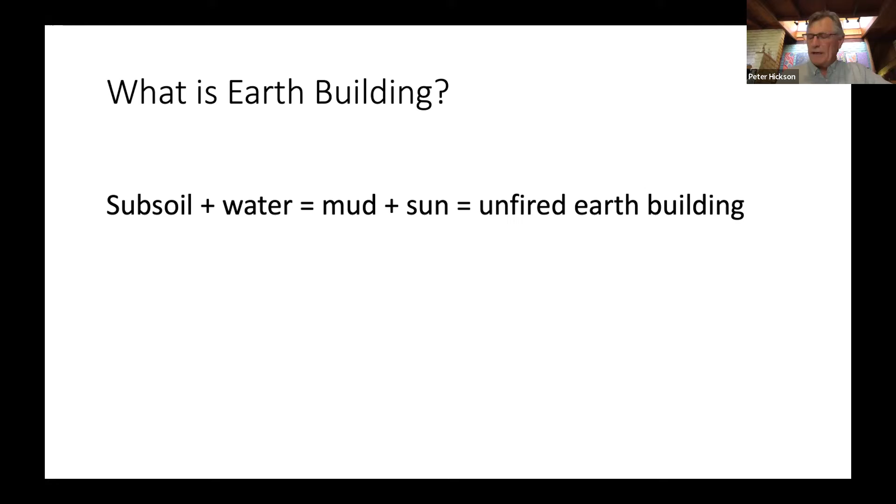It's found on every continent except Antarctica, to my knowledge. Archaeologists dated it back to Jericho some 11,000 years ago, though I think it's much older than that. I think the first Australians definitely used it, but how long ago, I don't know.

In Australia, there was wattle and daub, which is mainly what the first Australians did. Within weeks or months of the colonists arriving, they started to build wattle and daub and cob buildings, the sort of things they were used to in England and Ireland where they came from, as they had very little resources.

Mud brick was used in the colonies of Victoria, South Australia, and West Australia. Pisé came in the 1800s, and again was used post-war. Then stabilised rammed earth started in the 70s through to now. Poured earth is fairly recent, formed cob is very recent. The light earth method came in recently from Germany, to do with meeting energy requirements in colder climates. Earth renders came about for use on straw bale and on the light earth method. And then Ray's having a go at traditional, unstabilised rammed earth.

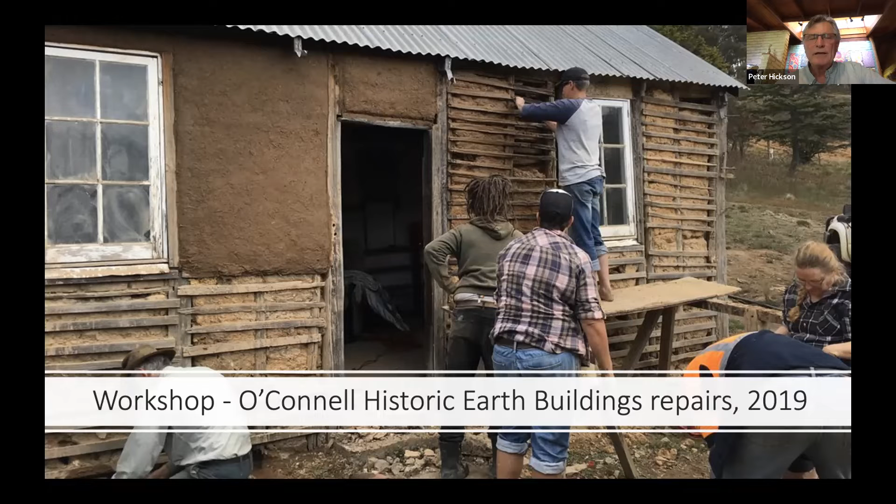This is an old building dating back to the 1800s that I had the privilege of working on a couple of years ago. It's wattle and daub, probably as basic as a building can get. We were doing some work on it - it hadn't been lived in for probably 20 years or so. There were uni students in it for a while back then, and while it's not listed as historic, it's definitely a worthwhile building to save.

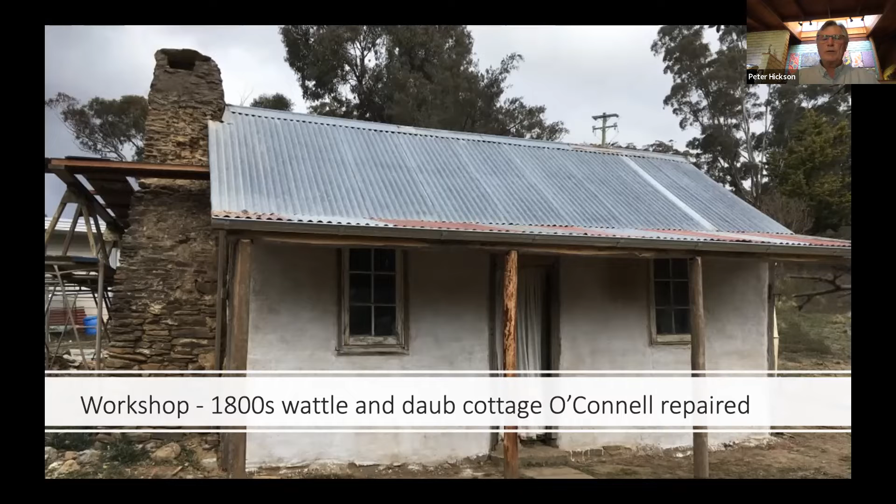So that's what it looked like after we did a little bit of work on it. We put a little veranda on it, capped off the chimney, and whitewashed it - earth render over the wattle and daub that was exposed before. And this is a cob building in O'Connell, New South Wales.

Some of my innovations and work have been involved with modern acceptance and practical considerations of using earth building today: local mud brick production, moving to load-bearing construction rather than post and beam, earthquake and hazard-safe buildings for low-cost solutions in Asia, pushing sustainability and the lowest possible earth embodied energy, incorporating renewables for zero-carbon full life cycle performance, optimizing earth thermal characteristics, lobbying for an assessment pathway for low energy passive buildings, climate resilience modelling, and then monitoring, assessing and auditing earth buildings to see how they go.

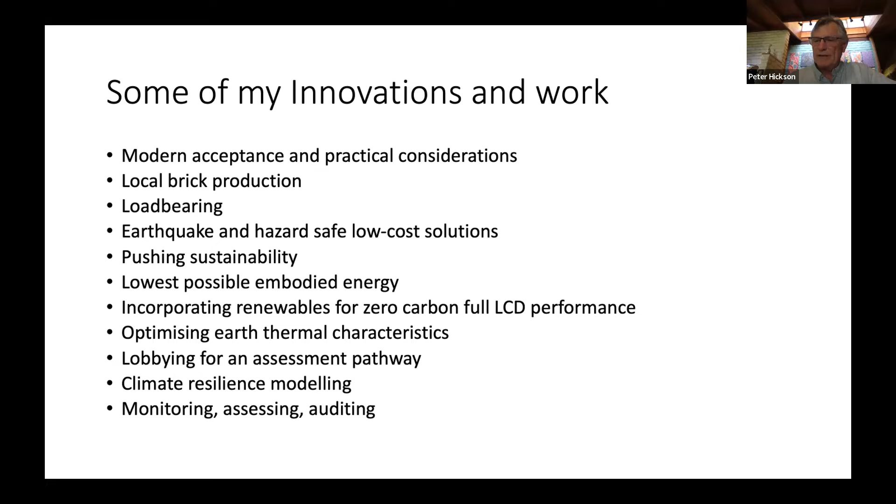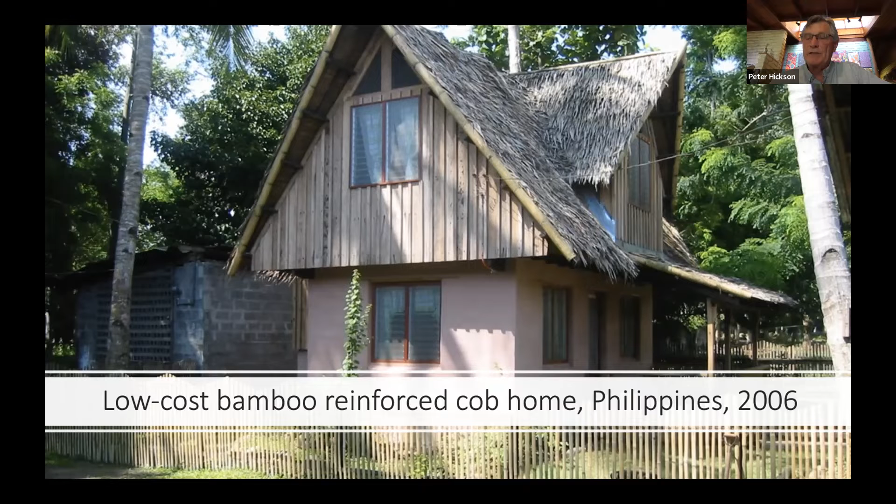Now, this is a low-cost building - a bamboo-reinforced cob building that I built in the Philippines for low-cost housing. It was tested at UTS University and achieved multiple shakes at 8.5 Richter and wasn't destroyed. So the innovation there is the fact that it's not really the material earth that's a problem, it's more how you use the material.

This is a carport and mud brick workshop that was lost in the Black Summer bushfires. You can see that the carport, all the iron and timber, which was open, took out the building and destroyed everything except for the mud brick wall, which was still standing.

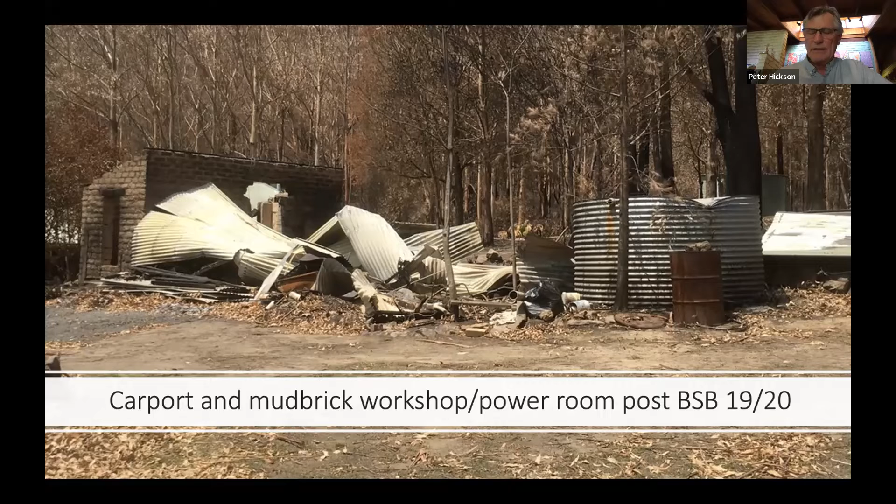You can see in the middle of the photo that the lintel and the doorway were burnt out. So some of that had to be deconstructed and reconstructed, but the mud brick was able to be saved and went back into a building built to be bushfire resilient, locking out embers, turned into a garage rather than a carport. There's a lot of detailing in terms of ember exclusion, so that should survive.

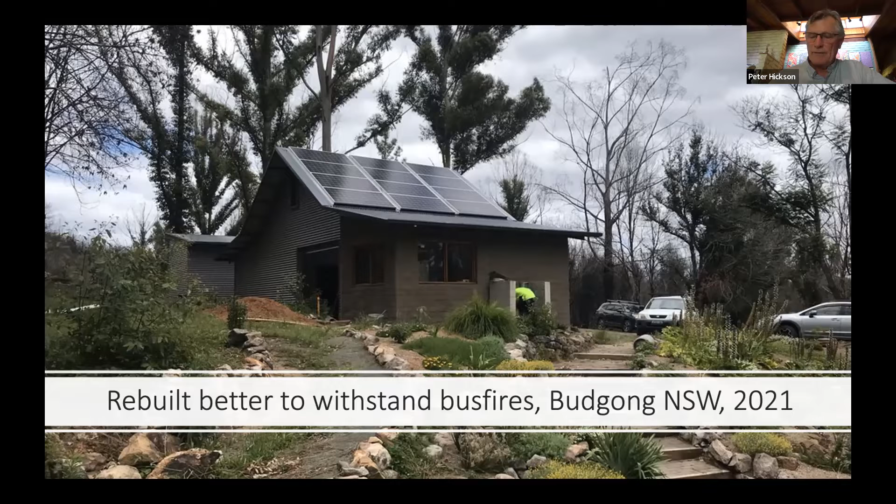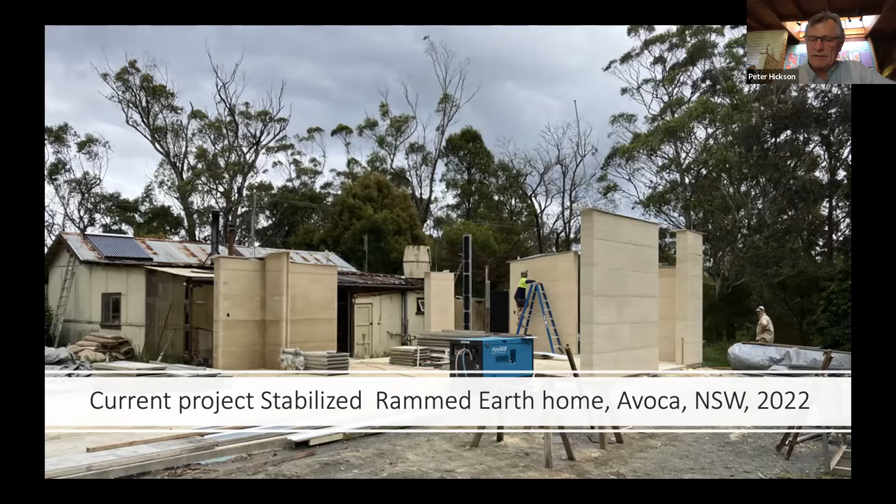This is the current project at the moment in Avoca in the Highlands, the other side of Kangaroo Valley from me. The old house in the background, part of it will be demolished back to the sound core, and that'll be linked into this new part of the building. I tried some perlite under the slab there, rather than doing a waffle pod. I don't like the sustainability of polystyrene insulation, and it sort of has to go to the tip to get rid of it at the end of the building's life. Unfortunately, you can't separate it from the concrete to recycle the concrete even.

There are a lot of innovations going on around the world. Over 11,000 years, people were self-building with different climatic and resource shortages, using what was available locally. Some people had no timber, some people had timber, freezing cold climates, very hot climates, all sorts of climates and conditions around the world, and the resources available to people, including their own time, has come up with a huge variety of beautiful vernacular design developed across the world. I'll just go through that. All these buildings are built by hand for people, so they're quite beautiful buildings.

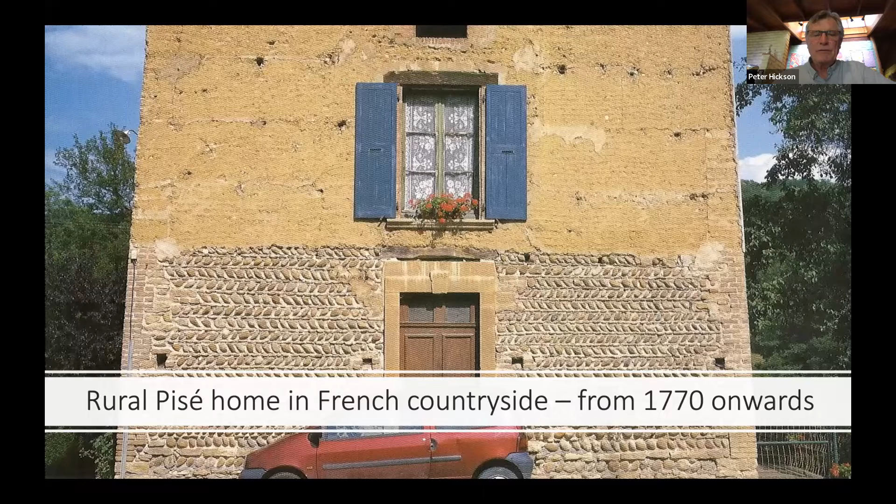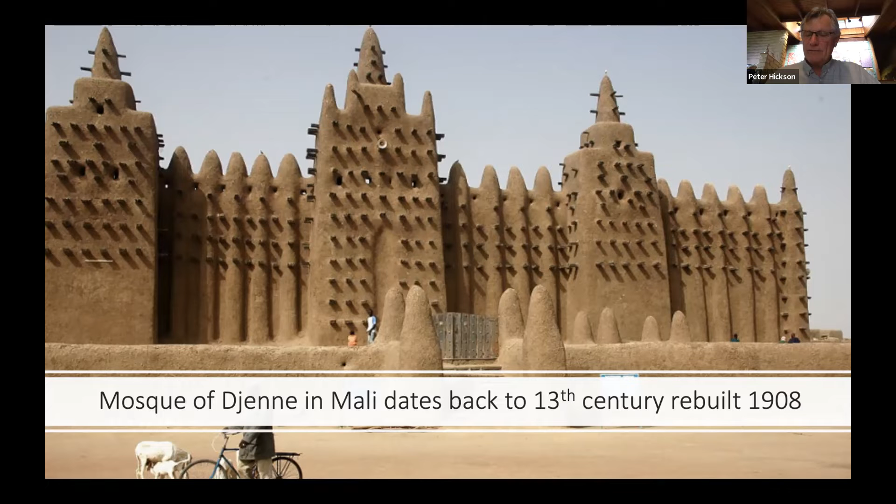Yep. So this is an ice house. They started doing these 700 years ago. They produced the ice outside in shallow pools and then they store it in a pit below. There's a pit, exploring that, and there's the roof of the ice house above. This is a mosque in Mali. They built the scaffolding into the walls, so they can do annual re-rendering by the community.

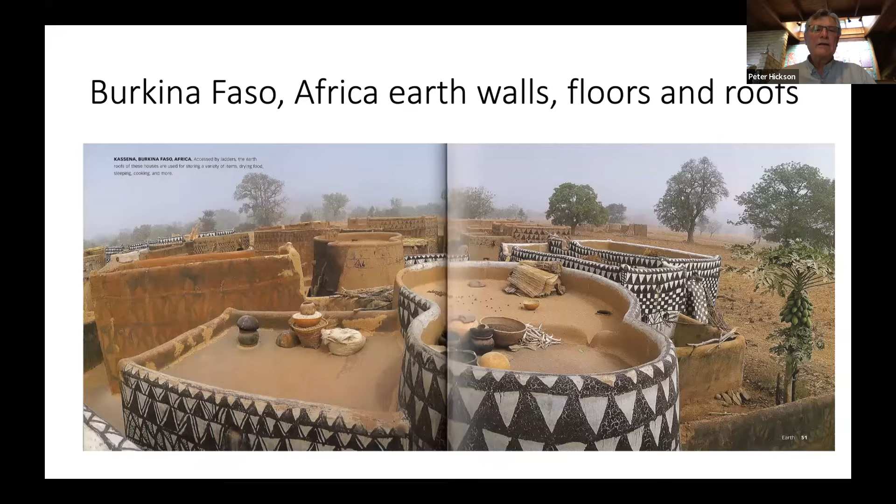In New Mexico, they used things like cactus juice to protect the walls from erosion. Beautiful buildings in Africa, where they used earth in the floors, walls, roofs. Here's an apartment block in France. In Lyon, there's a whole area where there's a rammed earth revival, started with Francois Cointeraux in the mid 1700s, and there's an extraordinary amount of buildings there. I'll get going through this.

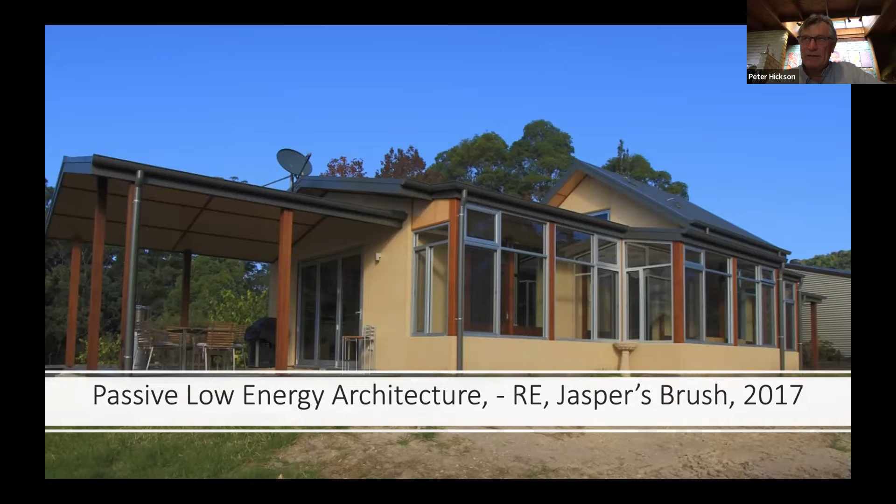There's a little building I did with earth floor and walls. I've tried to make it as sustainable as possible. All the earth walls came straight out of the ground there, out of the footings. It's got rubble footings, recycled windows, earth floor, and I tried to make it as low embodied energy as possible. It was built for a client who wanted to use their holiday house any time of the year and be comfortable. So it was designed to trap the sun in the winter and keep the house warm, and the veranda ventilated in the summer to keep it cool, fully ventilated with louvers.

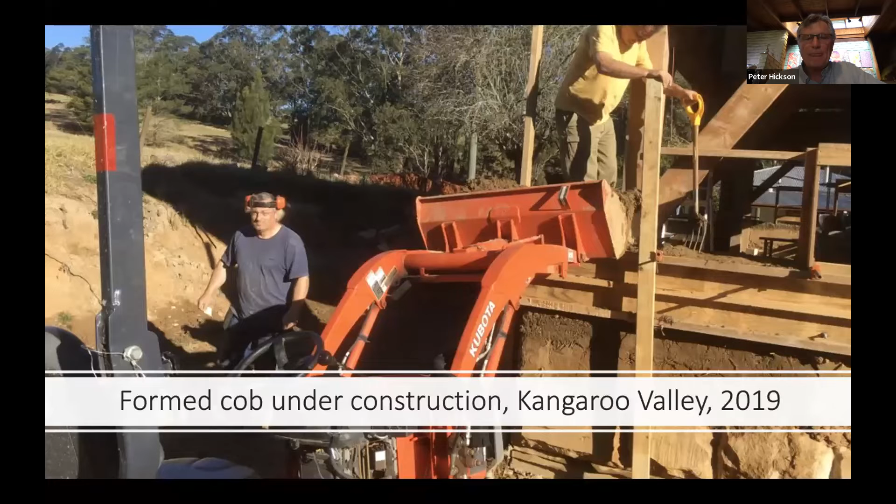It's inside. This is formed cob, which is something I'd like to work with. This is an experiment in Kangaroo Valley. That's the finished product there. That's all the local material straight out of the footings, rubble footings in that as well. Free draining footings.

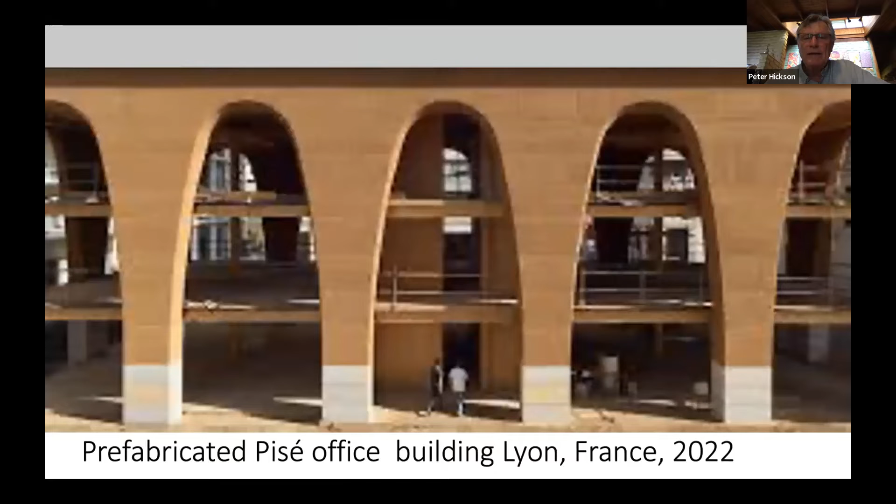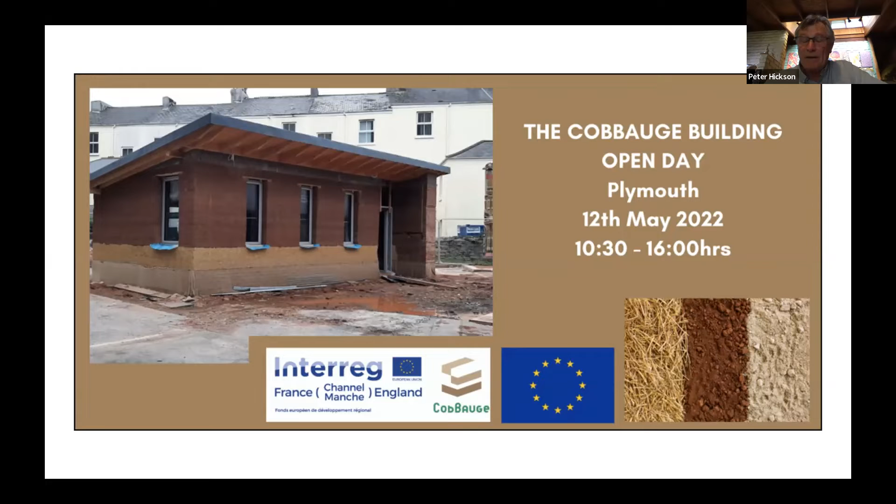So this is a co-housing project in Lyon, France, a recent one in the last 20, 30 years. Prefabricated rammed earth building in Lyon, brand new. All those columns were made in lumps and then lifted into place. This is a cob project at Plymouth University, where they're experimenting with getting cob up to code. In France and England, there's a joint research project there.

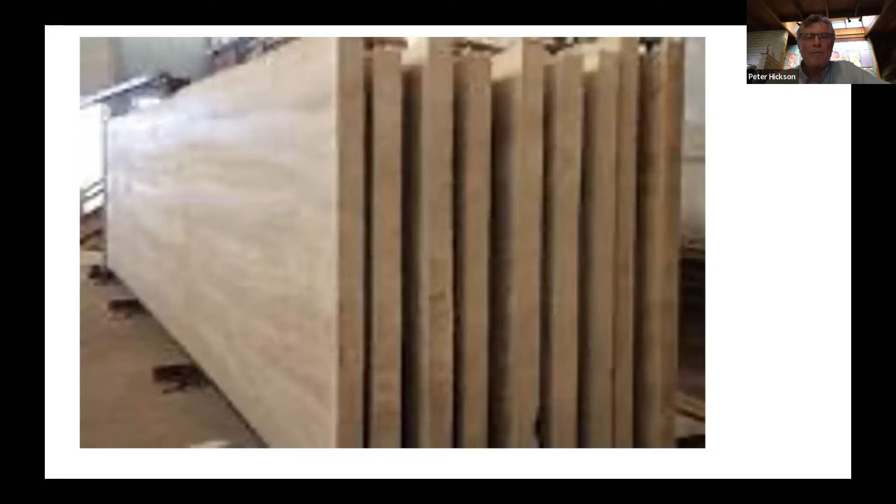Prefabricated rammed earth panels are becoming big time in Europe. That's a big factory, Martin Rauch's factory, where he does huge walls and then cuts them up, stores them during the colder months, and comes out and puts them together when the spring comes.

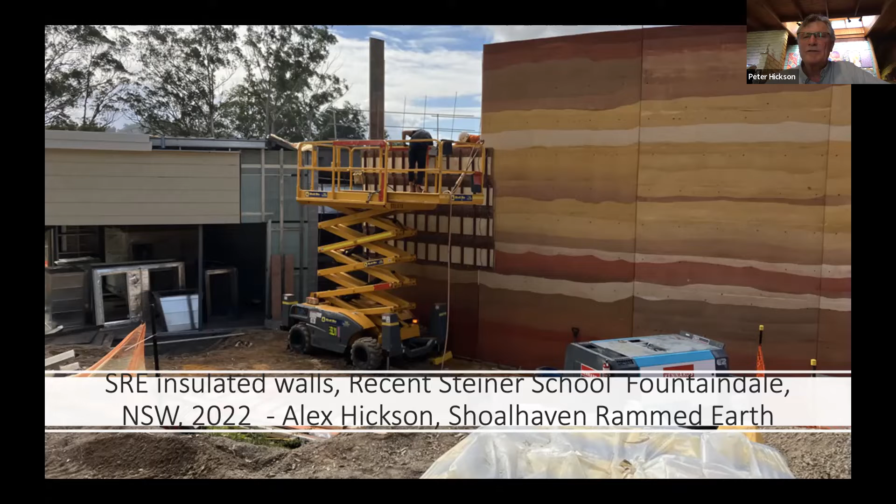This is a project that my son's doing at the Steiner School up on the Central Coast. I don't particularly like the colours, but it's 10 metres tall and 400 mil thick and insulated. So it's got everything going for it. So can earth building meet today's challenges? Safe, healthy buildings, yes.

Healthy lifestyle, yes. Comfortable, adaptive comfort, yes. Affordable to own and operate, yes. Energy efficient? Well, we're working on that, but certainly they give you comfort, adaptive comfort is good, and they're healthy with natural ventilation, and they can get passive low energy, full zero life cycle design.

They're very desirable. They can be beautiful, sustainable, and I've done some modelling using CSIRO analog towns, so we can work out what our buildings are like in the future. And we've just discovered that they're climate change resilient. Their performance actually improves in time.

So passive low energy earth architecture, I'm going to talk in a couple of weeks on passive low energy earth architecture. And I think it's the answer for everyone and anyone, anywhere in the world, who can build with earth and achieve all those outcomes. And I think it's the way of the future. It was definitely the way of the past, but that's where I'm going to leave it. There's plenty of questions I can answer in questions. I think that covers stuff.

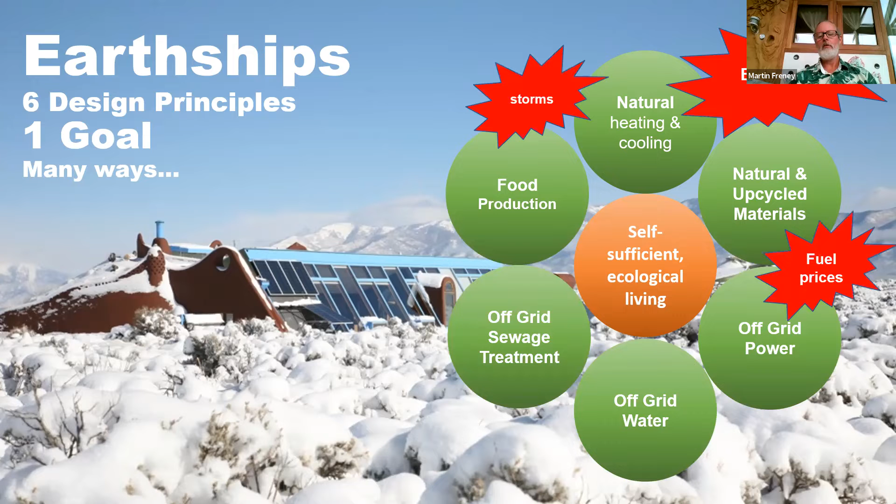So the number one goal of earthships is self-sufficient ecological living, which is also anticipating some of the things the 21st century has got coming for us. It does this with 6 design principles: natural heating and cooling, natural and upcycled materials, off-grid power, water and sewage treatment, and food production. This is anticipating threats like bushfires, storms, rising fuel prices, water restrictions, the next pandemic, and food security. All these things are addressed through the earthship design in one way or another.

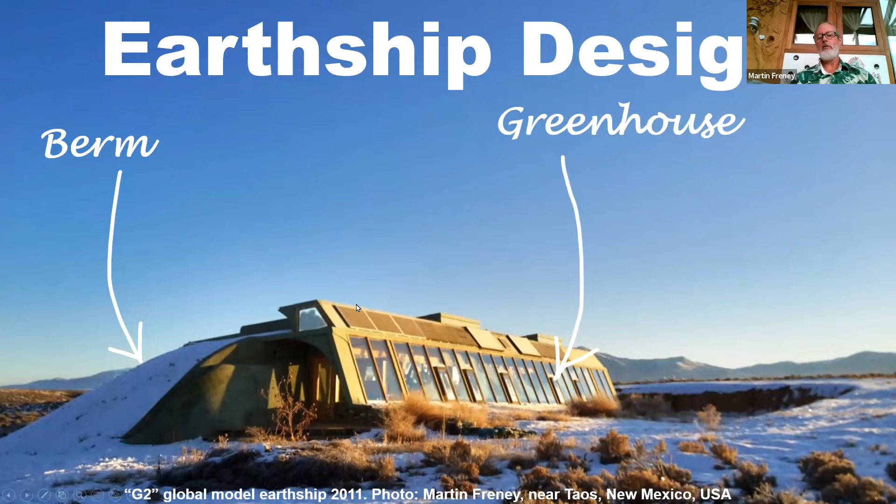So I guess the 2 main innovations with the earthship design are this big mound of earth at the back of the building, the south side, also often the east and west side, called the berm or the earth berm. That's about 1,000 tons of earth, which essentially regulates temperature inside the building. The other thing is the greenhouse on the north side of the building.

So yeah, the berm is, I like to think of it as the thermal battery, which is storing the energy captured from the sun in the greenhouse. And this berm is also a terrific defense against bushfires and storms, because you've got about 1,000 tons of earth between you and the bushfire or the intense wind. The greenhouse is this powerful solar engine that charges that thermal battery. And it also has many other wonderful functions, which I'll go into in a minute.

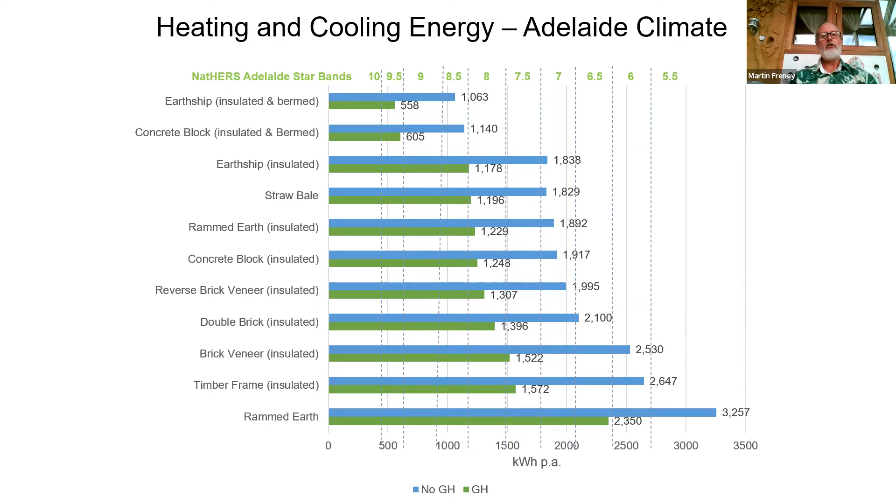This is some of my PhD research, which looks at the energy efficiency of different types of walls. And if you look at the top of the graph, what I found was that an earthship that is insulated and earth bermed comes in at about 8.5 stars. And then when you add a greenhouse, that's these green bars, that almost halves the energy consumption, because you're getting that wonderful free solar energy from the sun. So what I concluded from this graph is that the earth berm and the greenhouse are these 2 kind of magical ingredients which can lead to very low energy use for heating and cooling in the home.

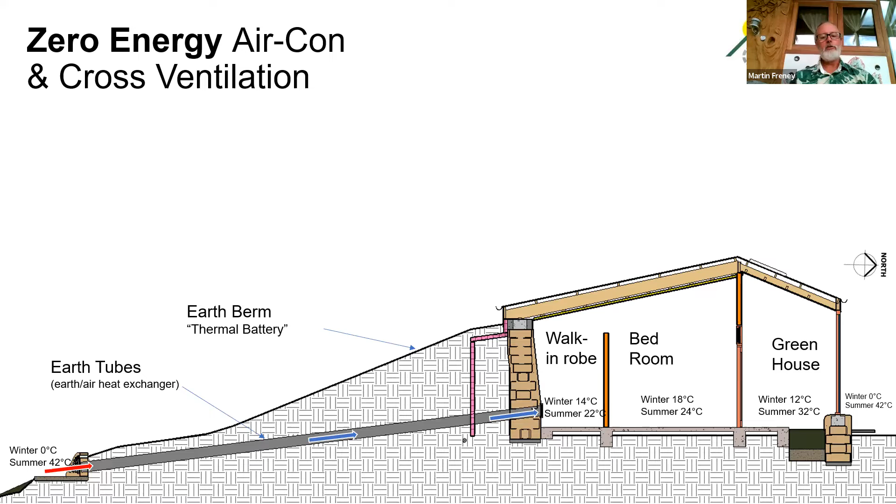So that brings me on to principle number 1, use physics, not fuel. So this is a cross section of the earthship, noting that north is out to the right here with the greenhouse facing north, the earth berm or the thermal battery to the south. There are also these pipes called earth tubes that go through the earth berm. They bring fresh air into the building and condition the air to the stable temperature of the soil. So it's like free air conditioning.

There's rigid polystyrene insulation to stop unwanted heat loss from the retaining wall that is typically made out of old car tires filled with earth. But you can also use other materials suitable for retaining walls, such as concrete blocks or rammed earth, really whatever retaining wall system you like. But of course, you want to make an ecological choice there.

It's got a highly insulated roof, an openable window from the bedroom or living space into the greenhouse, and then an openable skylight. And what that does is it allows hot air from the greenhouse to exit. Hot air rises, of course, and that brings in this cool air from the earth tubes. And so I want to also talk about this idea of buffer zones. The berm and the greenhouse are buffer zones that isolate the building from air temperature.

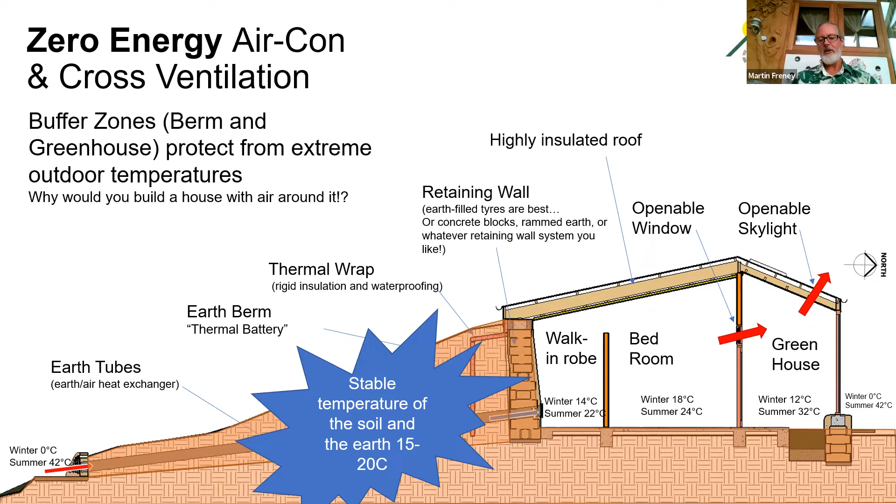So why would you want to put air around a house? Wouldn't it be better to put the stable temperature of the soil, which sits at about 15 to 20 degrees? You've got your highly insulated roof, and then the greenhouse is also a buffer zone, buffering the living spaces from what's going on outside the building. So you're kind of fooling the living spaces into thinking that it's only 32 outside rather than 42. In my Earthship, I'm getting 22-degree air coming through the earth tubes when it's 42 degrees outside, and this is with no fans, no power. So yeah, this all leads to remarkably stable indoor air temperatures.

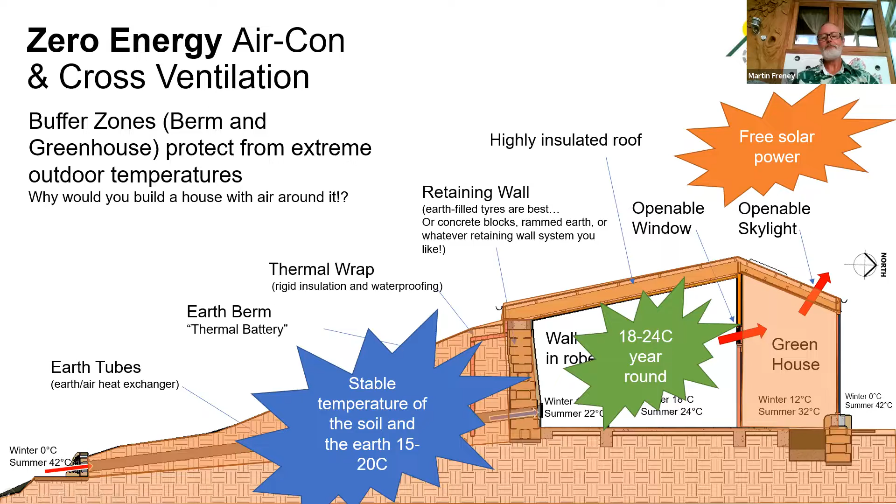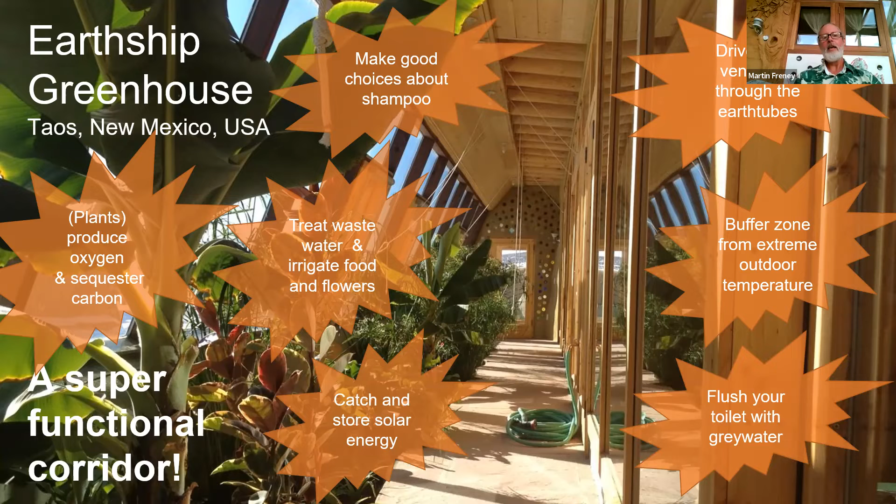The plants are producing oxygen and they're sequestering the carbon dioxide that you exhale. And it forces the occupants to make good choices about shampoo and other chemicals that they're pouring down their drains, because guess what? It ends up in your garden. Ultimately, you get to enjoy the mental health benefits of an indoor garden. And there's a whole new science emerging called biophilia, which proves these benefits.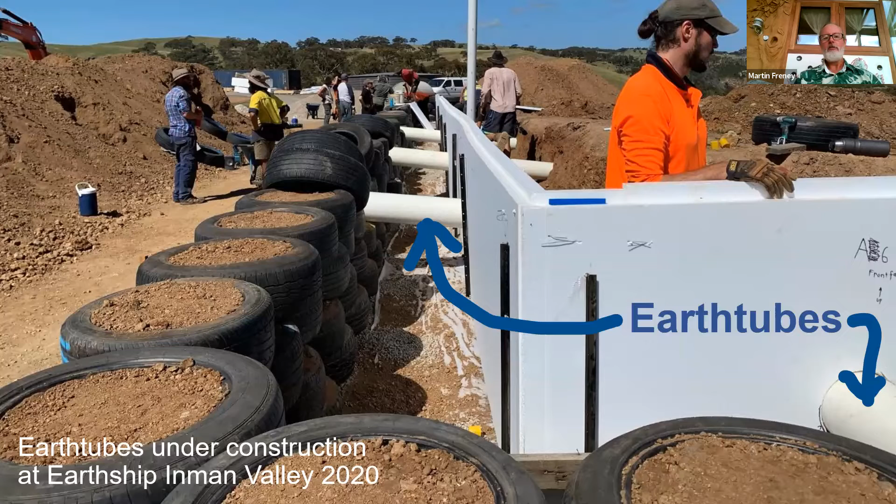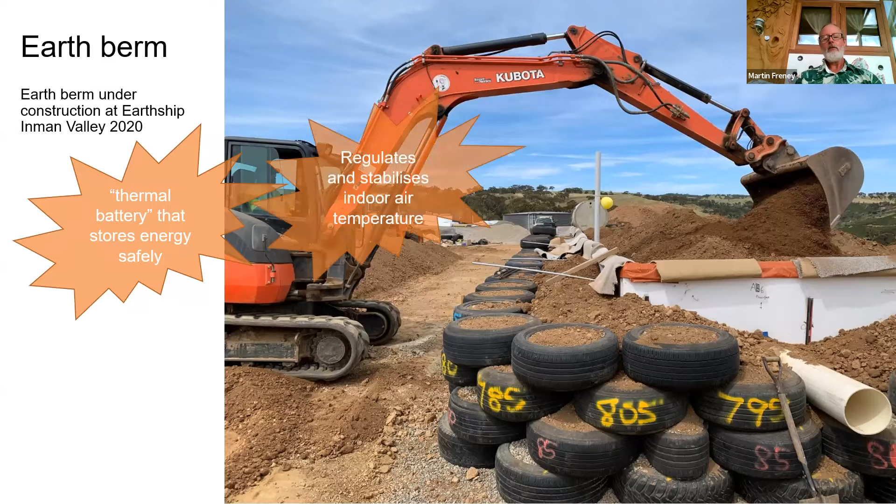So here's some earth tubes under construction through the tire wall. You can also see the polystyrene rigid insulation. So this is the free air conditioning that's going on constantly 24/7, 365 days of the year, no fans, no moving parts. You get lots of air changes through the building, which means healthy indoor air. Here's the earth berm under construction. The thermal battery that's safely storing heat energy. It's regulating and stabilizing indoor air temperature. It's that buffer zone that's protecting you from extreme outdoor temperature and protecting you from bushfires and storms.

So principle number 2, natural and upcycled materials. Well, this is why we build with tires. We humans have created a massive problem on the planet with car tires. Now, you can recycle them in various ways.

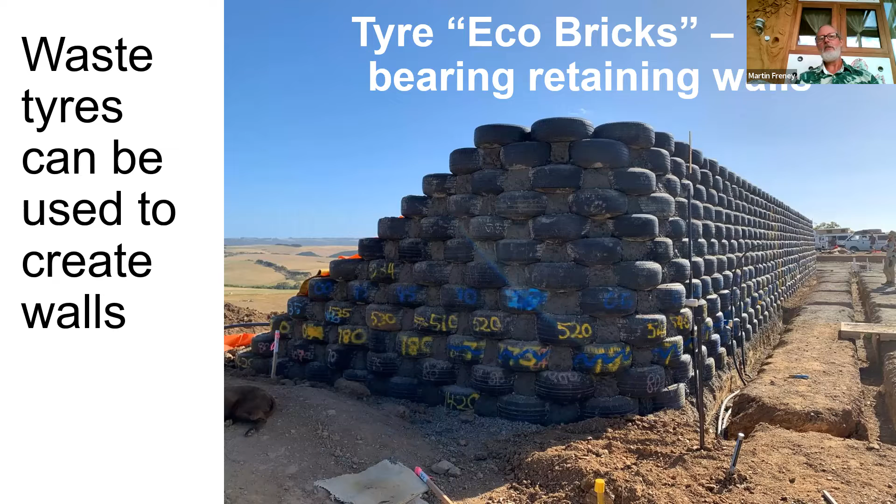Zero energy is really needed to transform these things into bricks. We just fill them with earth, essentially. So we just start by putting them on a compacted base. There's no concrete footing, which is another ecological advantage over other walls, which typically need big concrete footings.

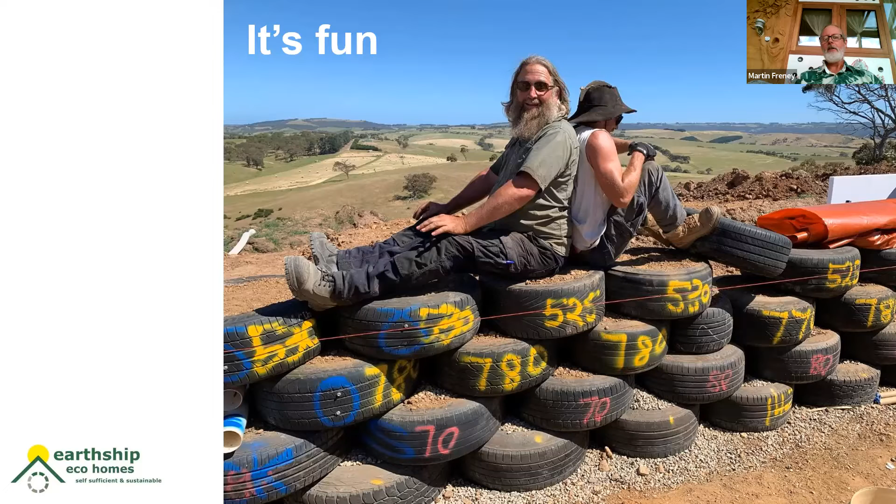We put a bit of shade cloth in there to hold the material in. You can see we've got gravel for the first layer, which stops moisture from wicking up into the wall. But an interesting thing about this is it's fun and people want to come and learn and get involved. We're just using simple tools like sledgehammers to compact the earth, levels, shovels. It's all stuff you can buy for $100 at the hardware store and get going.

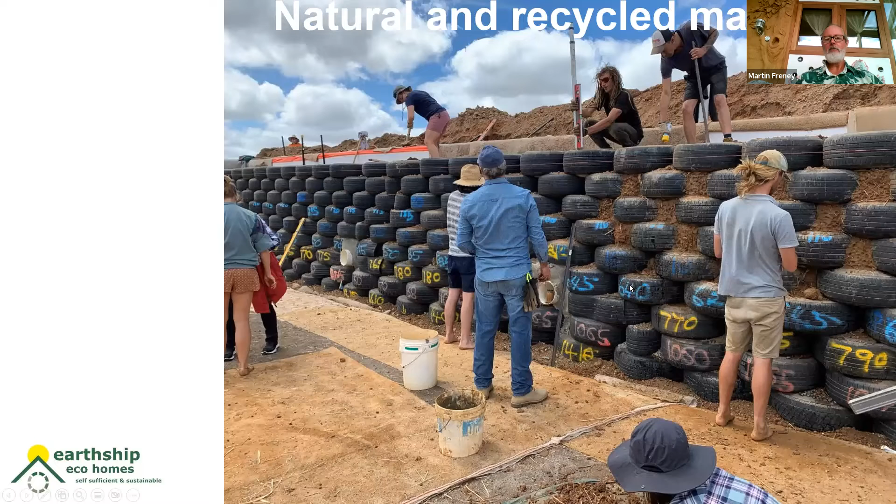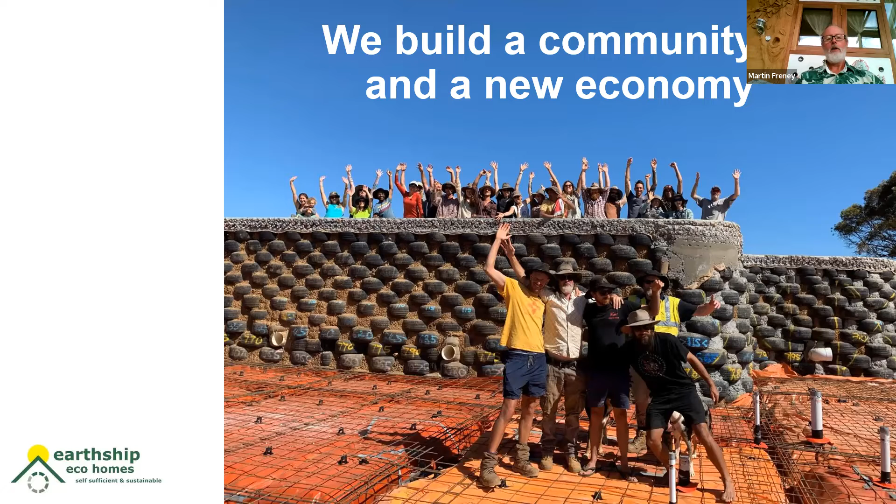Here you can see a cob mixture being applied to the tire wall in preparation for rendering. And it feels really good, and it is good to redefine waste in this way. You meet new people, make new friends. So we build the community and a new economy. These guys up here are paying us to actually teach them about sustainable construction methods, and it actually changes the paradigm of how the money flows through a construction project.

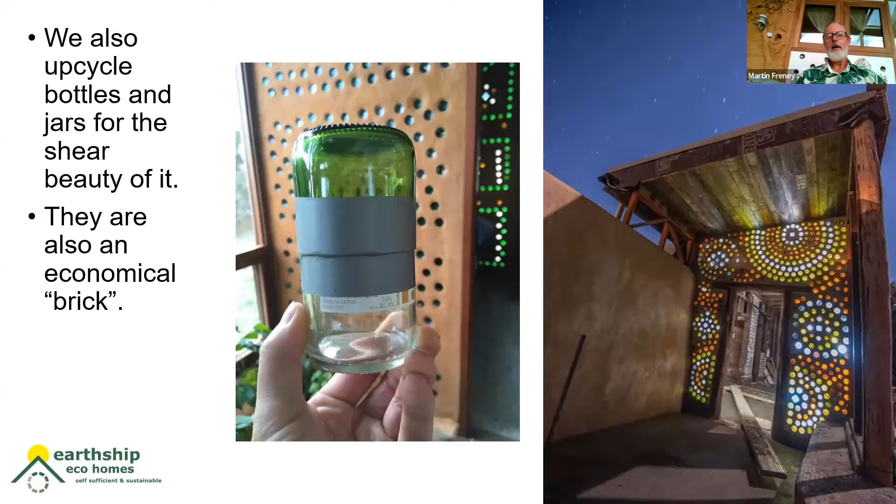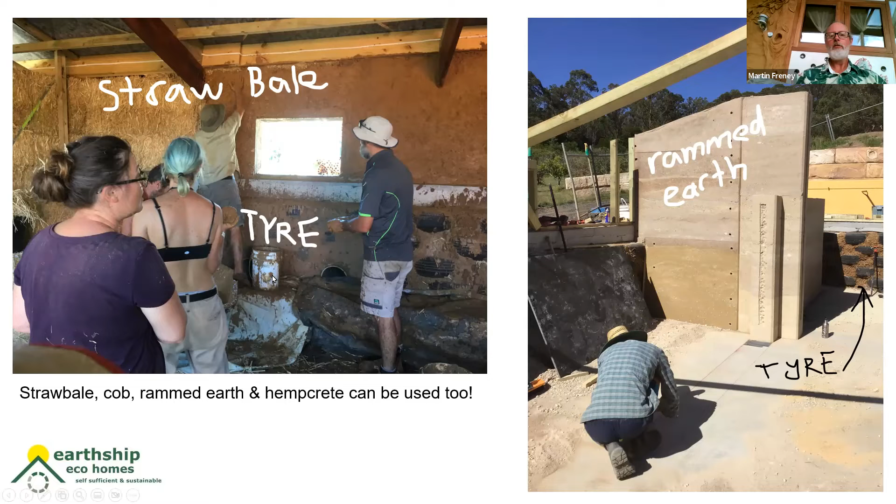But also in my Earthship designs, I'm experimenting with straw bale, rammed earth, cob, hempcrete. All these materials have their place in earthships as well. So I don't want you going away thinking that you must use tires, but the tires do have their advantages.

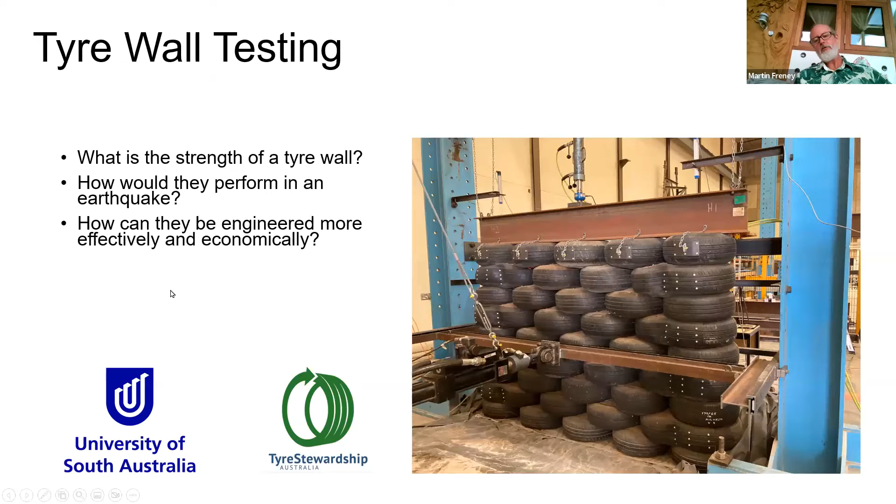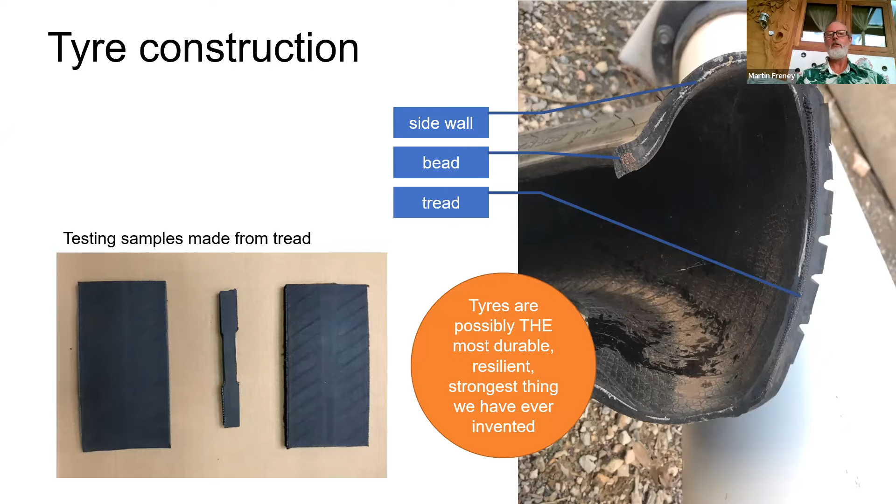I've crunched the numbers on the eco efficiency of the construction materials of these walls. So tire wall testing at UniSA, we've tried to measure the strength of these walls and figure out how they perform in an earthquake. These tires are possibly the most durable, resilient, strongest thing we humans have ever invented. So it does make sense to use them as a construction material.

And if I just play this video, you'll see the hydraulic ram. We're measuring the force of the ram, flexing the wall. And what we found out is that these walls are like no other wall. They kind of bounce back into shape. They would be amazing in earthquakes, and they are certainly strong enough to be load-bearing, roof-bearing walls in homes.

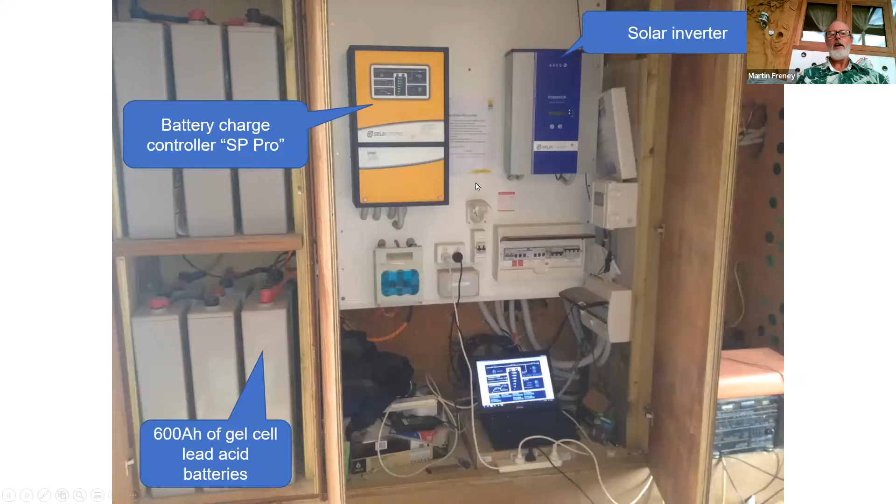So principle 3, renewable energy: panels, solar hot water, batteries, inverters, all that stuff. We know how to do that. The advantage of earthships is that they don't need a lot of these things. You can have a small battery system and small solar panels because the homes are so energy efficient for heating and cooling. And so again, my PhD research showed that it's more ecological to have batteries, panels and inverters than it is, in this case, the South Australian energy grid that I modeled.

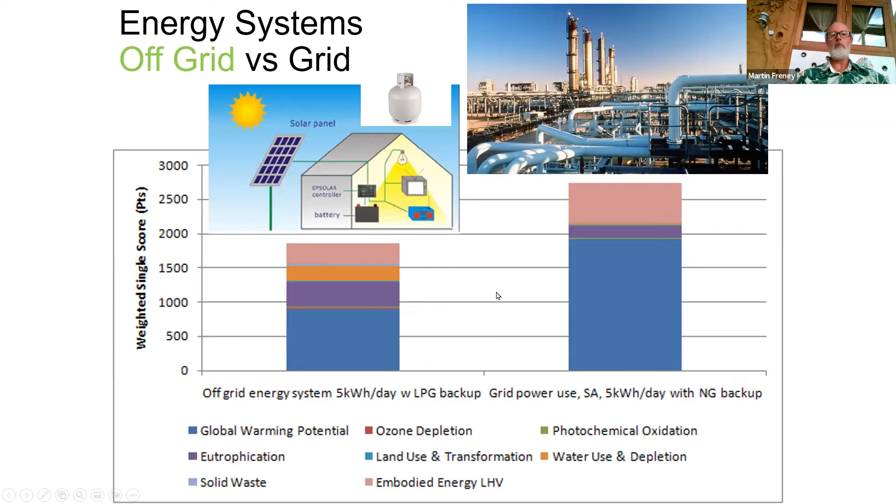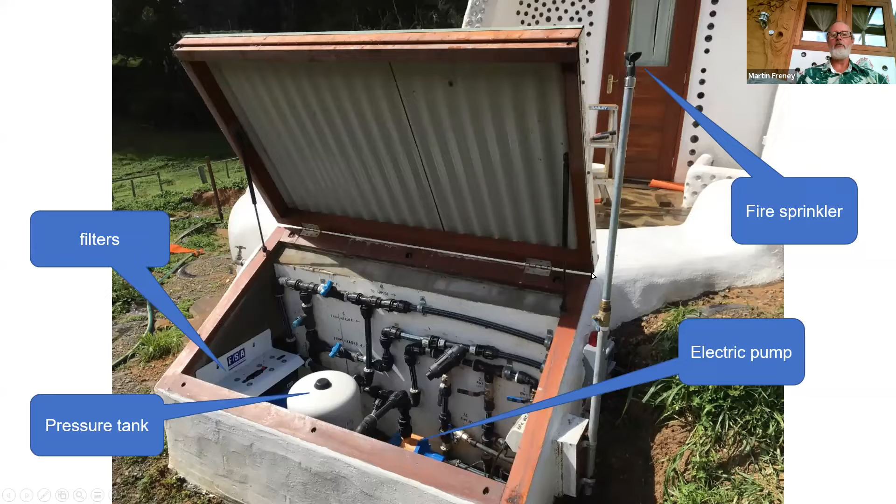All right, principle number 4, renewable water. This is my earthship again, gravel roof, filters the water, it flows into a big tank, which was, you guessed it, made out of tires. Then there's a box with an electric pump, a pressure tank, filters. This pressurizes the water to the house and also pressurizes fire sprinklers.

And again, this you can see a dramatic difference in how ecological it is, water tanks and pumps compared to the water grid, which uses vast amounts of electricity, concrete, pipes, chemicals for treatment.

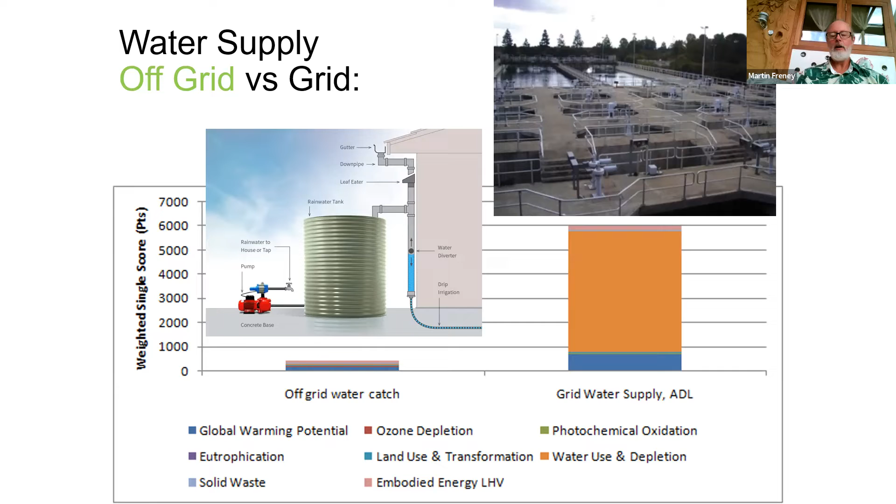So yeah, go off grid is my message. Principle 5, water is precious, so you've got to reduce, reuse, and upcycle.

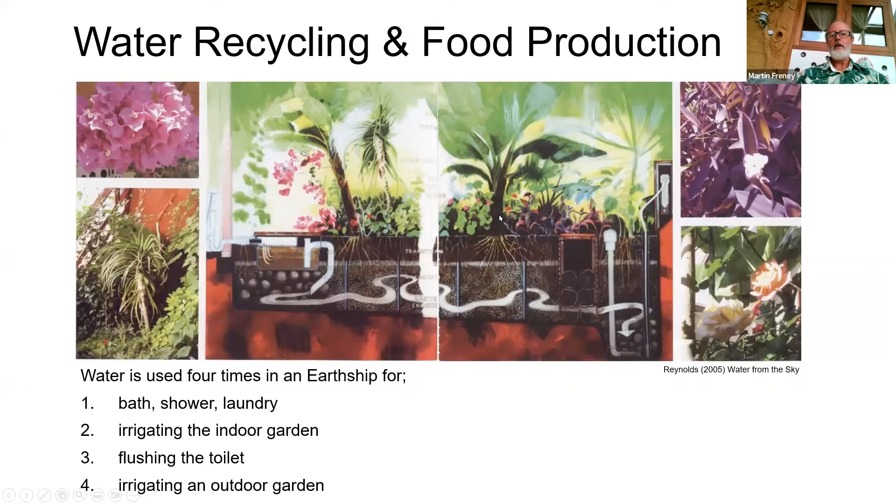The earthship does this beautifully with this indoor garden. At the end of the garden there's a grey water diversion valve. Usually you'll have it flicked to go into the garden, but sometimes, say you do a load of pooey nappies in the washing machine, you might want to send it to the septic tank. But 99.9% of the time it flows through this wicking bed garden with gravel at the bottom, and the water is wicked up into the plants so you can grow food. Again, much more ecological than sewage treatment plants.

Principle 6, the last principle: we're aiming for zero food mile food, organic food, grown with wastewater. This is the holy grail of food. It's at your doorstep, you don't need to get in the car to drive to get it. It's literally within your home.

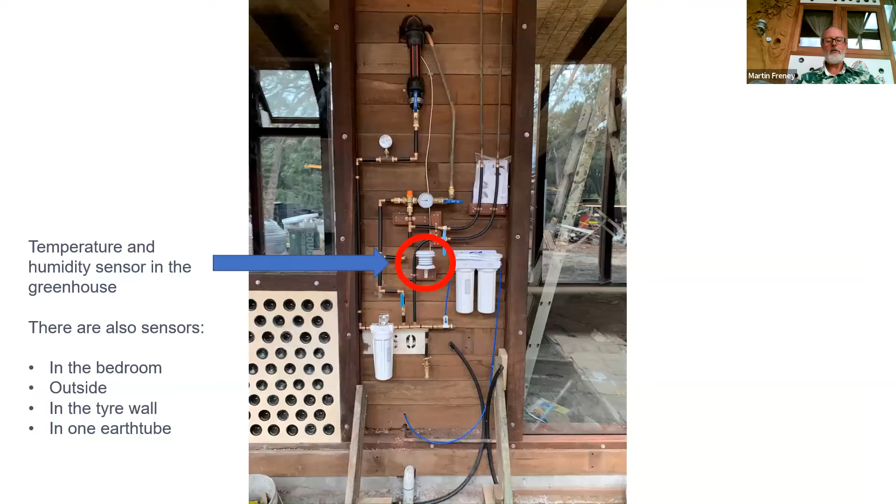Again, my earthship there. So I want to share some results of thermal monitoring. If you can't measure it, you can't control it. This is an earthship in Western Australia, full of temperature sensors.

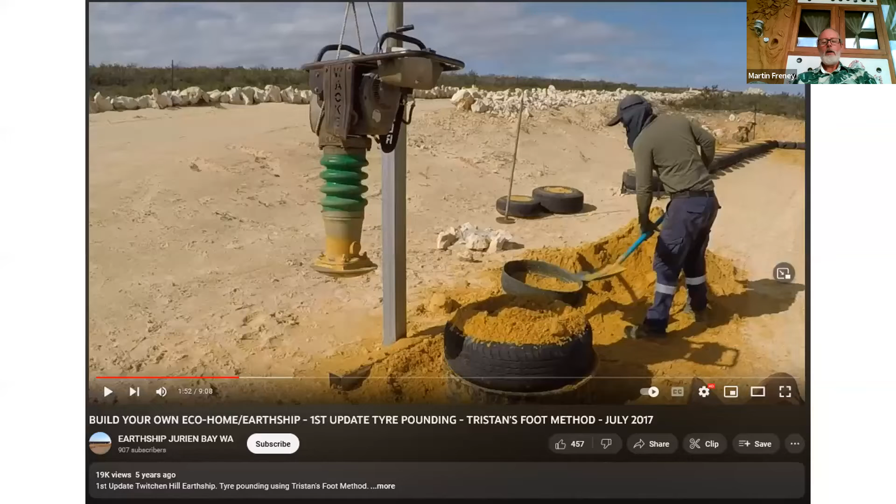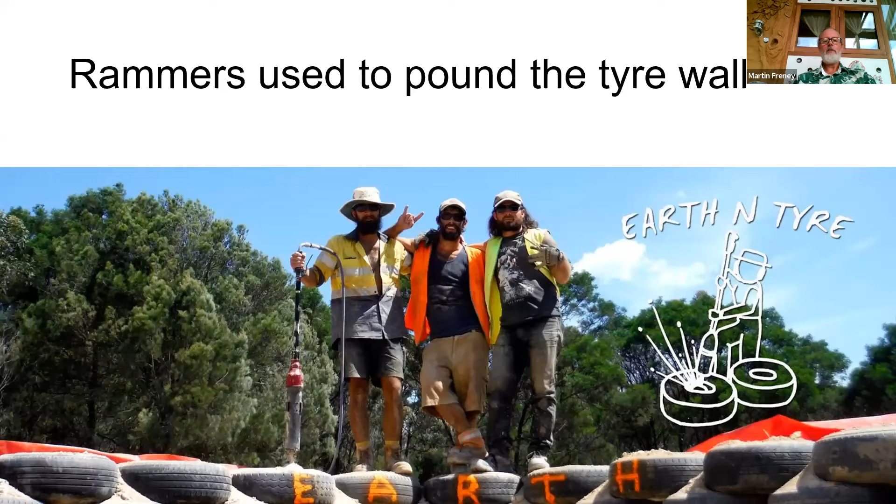This guy invented a tire pounding machine. This one's in Victoria, this one is in New South Wales. That one, they use rammers like you would use for rammed earth walls to pound the tires.

This is the one I just showed you in New South Wales, and the one I just showed you the performance graphs for in Western Australia, built by 50 volunteers in 4 weeks.

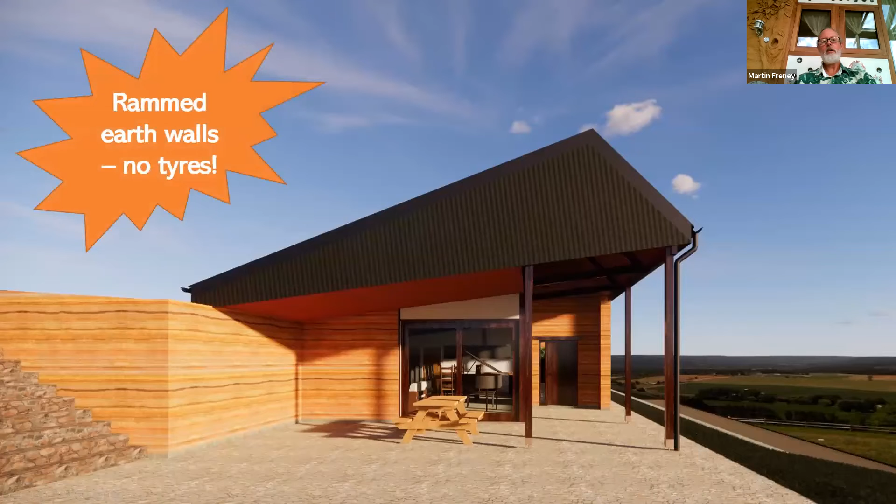This one's made out of rammed earth, in Tasmania, and they're actually going to build 5 of them on a strata title. Another rammed earthship, no tires in this one.

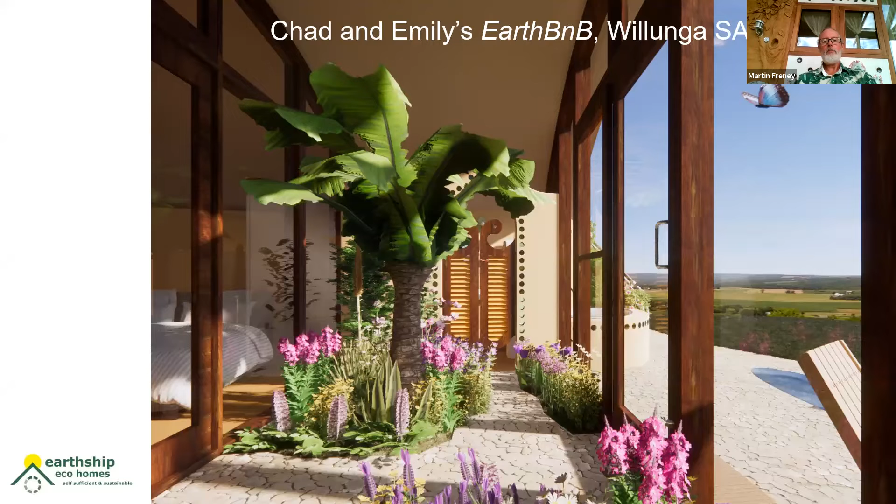And my latest project, EarthBnB in Willunga, workshops starting on the 3rd of February. This is going to be super bushfire resilient, and we're going to build it in 4 weeks. There's the floor plan, and there's where you sign up. Thank you.

Thank you so much, Martin. That's really interesting, some great photos, and it looks pretty enticing, I have to say.

Thanks, and Matt, thanks for the extra 3 minutes, that was handy. It was really interesting, and it gave a good lead into the rammed earth section that Ray will talk about. And because we are slightly over, there were a couple of questions, but I might move straight on to Ray and then leave time for questions at the end.

That's all, thanks, Ray. So do you want to get your slides up, Ray? Yeah, or photos? Yep, well, cheers. And while you're doing that...

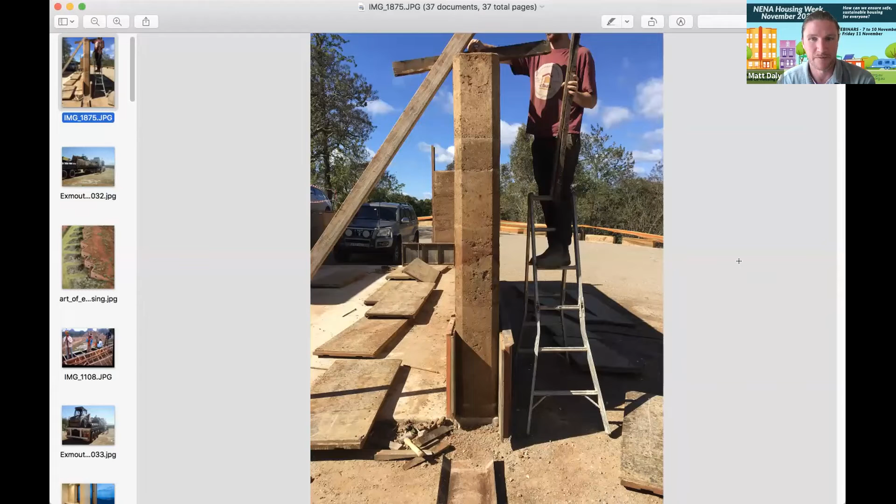Just to introduce Ray, who is an architect by training and has been involved in earth building for over 45 years, an active member of the Earth Building Association of Australia, and I imagine worked on a multitude of projects over that time. His most recent was the new secret garden at Western Sydney University, which is a permaculture design linked in with rammed earth buildings, and I think he'll touch on that as well.

Okay, I'm probably zeroing in on some particulars here. We've just been doing a lot of work recently with rammed earth without cement, as Martin was showing some of the embodied energy figures of rammed earth, but typically that would include cement, which bumps up the actual embodied energy. So I'd like to show pictures of rammed earth with cement, but also what we're recently doing, using on-site found materials, showing the color and diversity you can get, with just some simple detailing, so you can actually do rammed earth without cement.

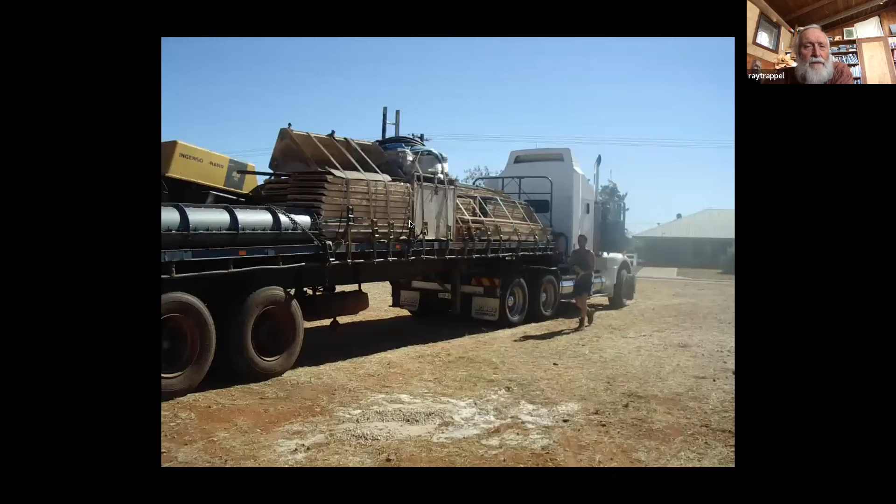This is typically the sort of gear involved in rammed earthworks for a large house. You've got all the forms, the bucket for a bobcat, we're mixing. There's some round forms for columns, which you can do in rammed earth. There's a compressor.

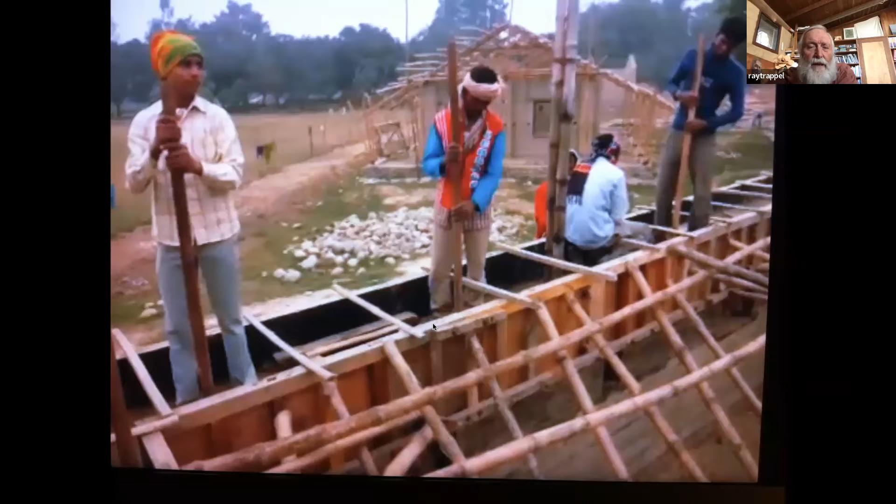Martin's saying to us, well, we know the history of rammed earth, but we don't know the history of cement with rammed earth. We don't know how long it will actually last even, whereas he's using much older techniques.

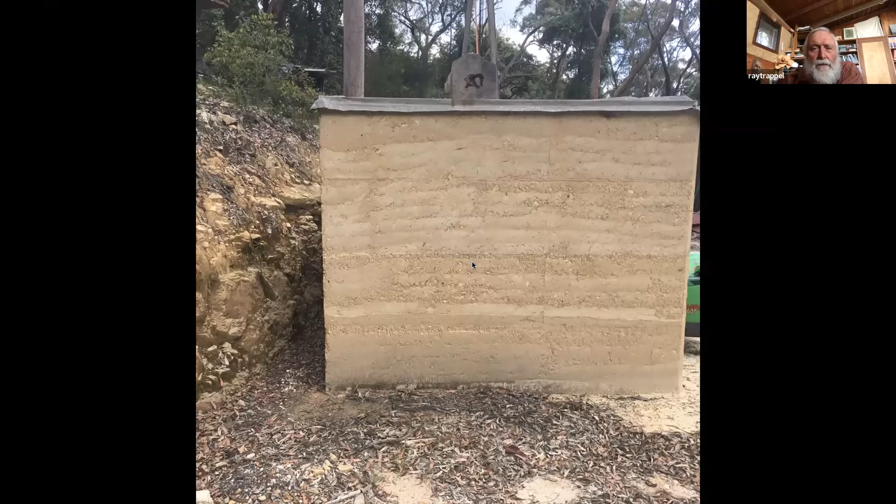Why I put this one in, it's an interesting shot. This is just - the soil for this was just found there. We excavated this site and you couldn't get much closer. It's a rocky sort of sandy material, and that's the earth form. So a very pretty wall, just done very locally. Embodied energy is so low because you're really only just using that material and putting in the wall.

You can see a little bit - I think the lime layer, you don't see a lot of it. Sometimes it can be quite a fine layer. I think the top one got missed out, but there's a bit of lime layer in the bottom of that wall.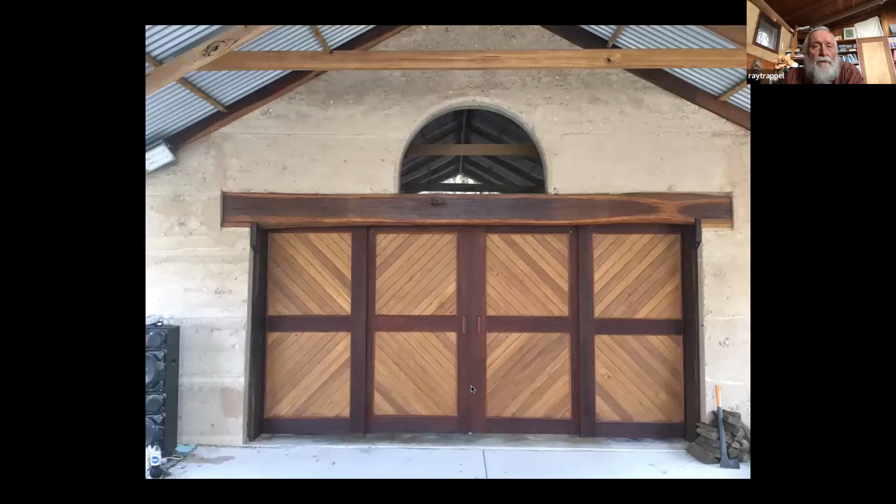Here's another one of our recent projects. We did a house over at Cranebrook, and again, this material used in this - you can see the lime layers again. This material is a recycled sandstone.

It came from a 12-metre hole at North Sydney. Would have been better to have used it in a building right near North Sydney, but still, it had to be moved off site. It's better if you intercept waste or use on-site waste, but if you're intercepting waste, often it could be already excavated, so you're not paying for excavation costs.

On this particular project, we used local clay from the house. We wet that up and mixed it with this crushed sandstone, and that was what we used to do this project. Hang on, I'm just going backwards here.

You can see the formwork lines in the wall, and when you take the formwork off you can remove those if you want, or you can leave them in. People like that patterning through the wall, showing how the wall was built. This formwork, developed by Steve Dobson in Western Australia, is a steel-backed plywood form. So it makes it quite light but quite strong, and that's what you need for rammed earth - a quite resistant wall, so you can ram more smoothly.

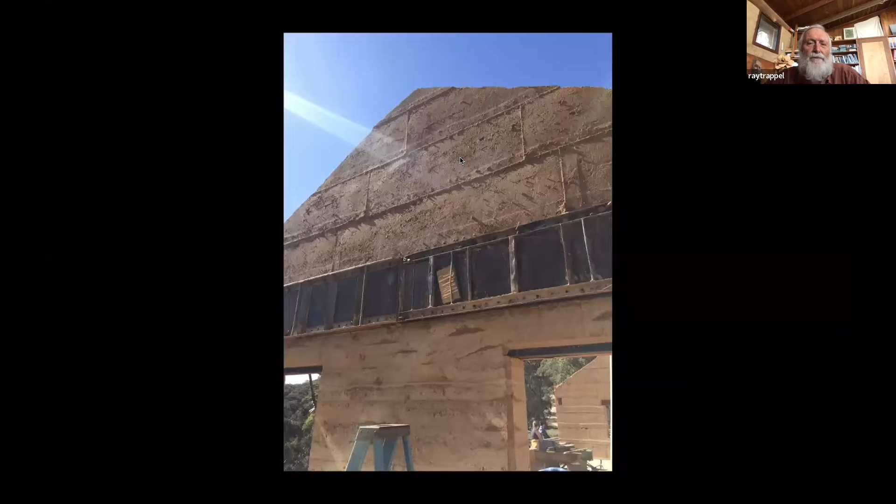Even then, with the sun along the face of that, you can see that it's still slightly in and out in parts of the wall. So it's very hard to get a wall absolutely dead flat, but then that's part of the character of the wall. Sometimes we like to have a certain openness to the structure of it, so they call that boniness. They see some of the gravels and use those textures a little bit more.

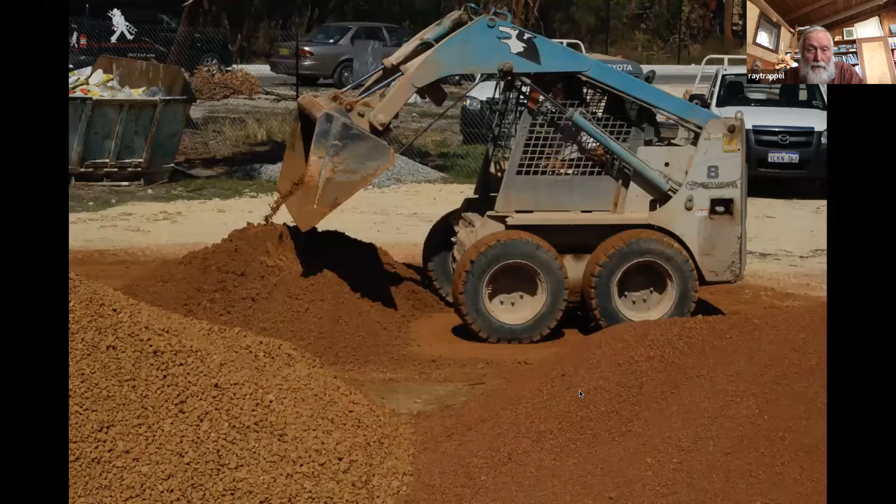This shows typical materials that would be mixed up together. This particular project did have cement, but it's still very similar.

There we go, wrong way - pushing up rather than down.

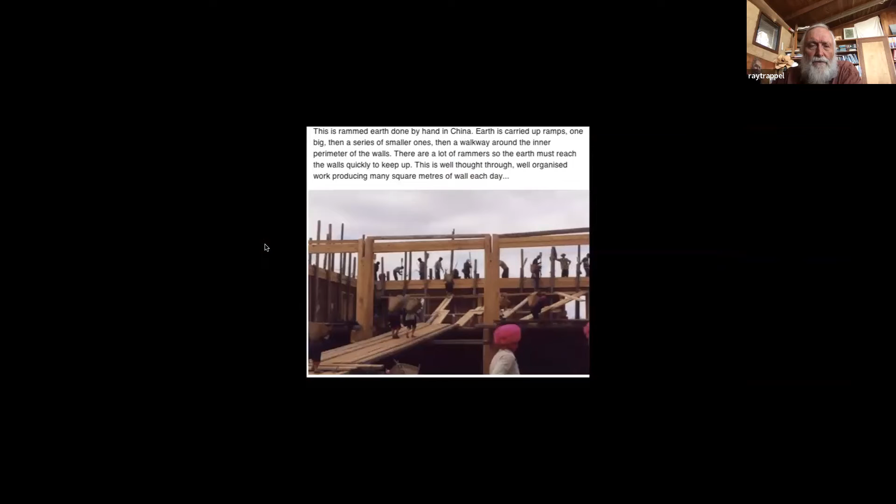It's showing some work in China, just a lot of people ramming ramps to get the soil up. And there's the typical Chinese rammers.

A wide head rammer with a narrow head rammer. We've made them and they work quite well.

Actually, the little narrow head rammer, you get quite strong ramming. And in China, they're almost ramming walls as quickly as what we can with our equipment, with their teams.

Just choosing the right time of the year and the right moisture content and sourcing material locally. And even though they're using hand ramming, still able to make similar amounts of wall in a day.

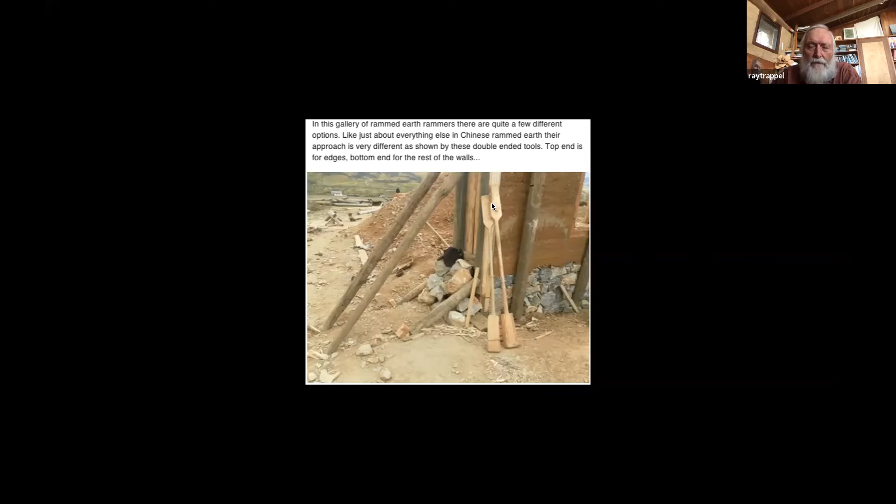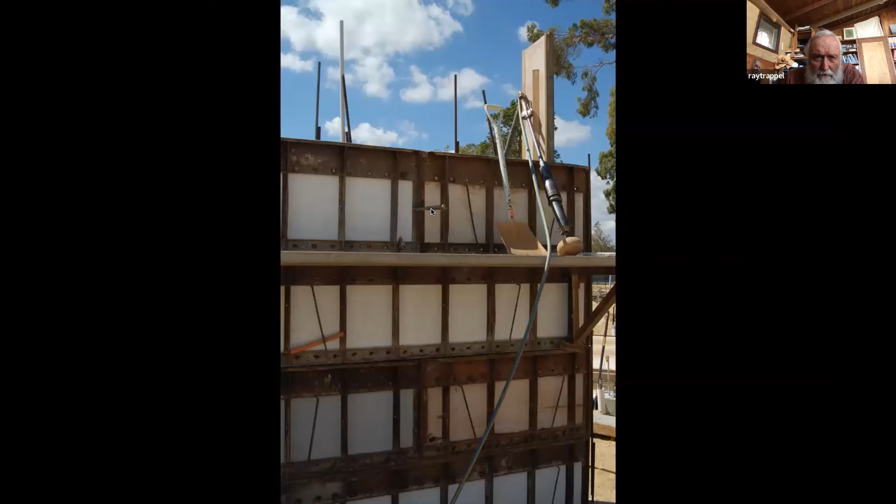Showing some of the formwork, again with that steel backing. This formwork has a wider top than what we've got at the moment. But the beauty of that is the through bolts sit a bit lower, so your last render can be on top of that.

So the bolts - when you take the formwork off, you don't take the bolts out. They're slightly bent, but it doesn't break away the top of the wall. So it's just a little bit heavier, but it's a better way to use your formwork.

There's brackets that fit to that formwork, so you can put planks on, and there's your end panels, which will have a chamfer built on the side, and that's clamped into the forms.

You have bolts behind, and from those bolts there's wedging put behind the end forms. That shows the rammer that's used - it's a little pneumatic rammer, about a 14 kilo rammer.

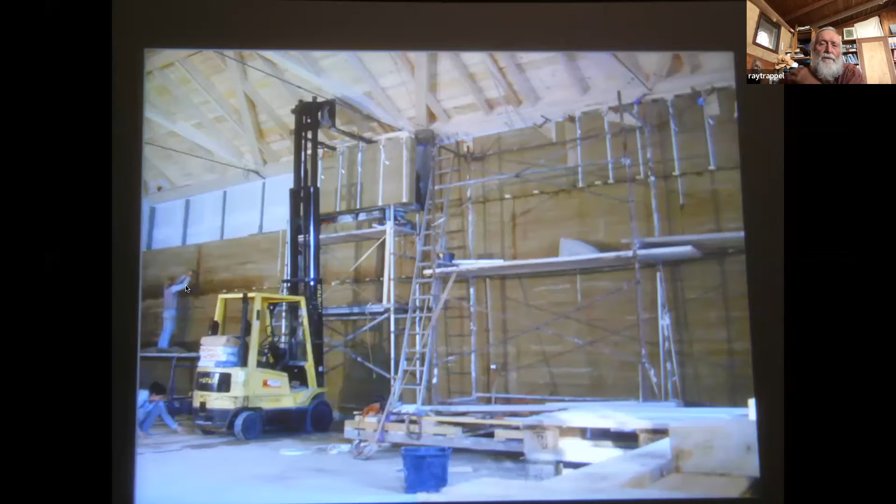And then later on, they have a system where this lady here - it's Martin's sister, who's quite good at it - leads up the team, something like 20 or 30 people, just doing the actual repair of the panels.

And these panels are made - this is in Austria - typically during the winter.

And then when the summer comes and the building period, they can get on site and fairly quickly put up quite a lot of rammed earth without all the ramming on site.

So it's just really this finishing and installing. Sometimes these are put in place by cranes, but obviously you can see how on a slab a forklift can lift up a panel and put it in place.

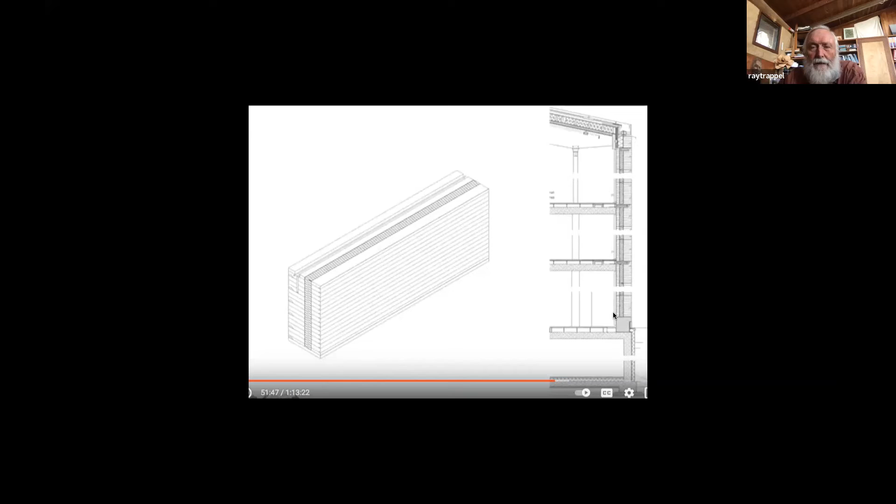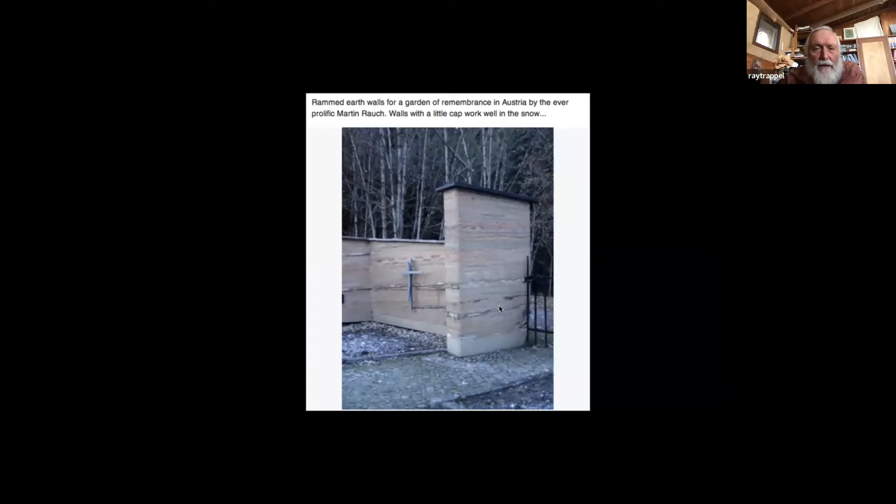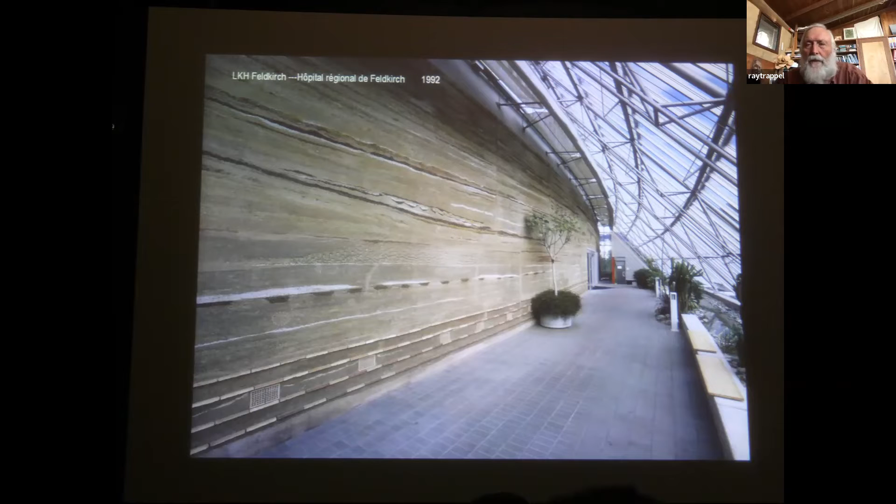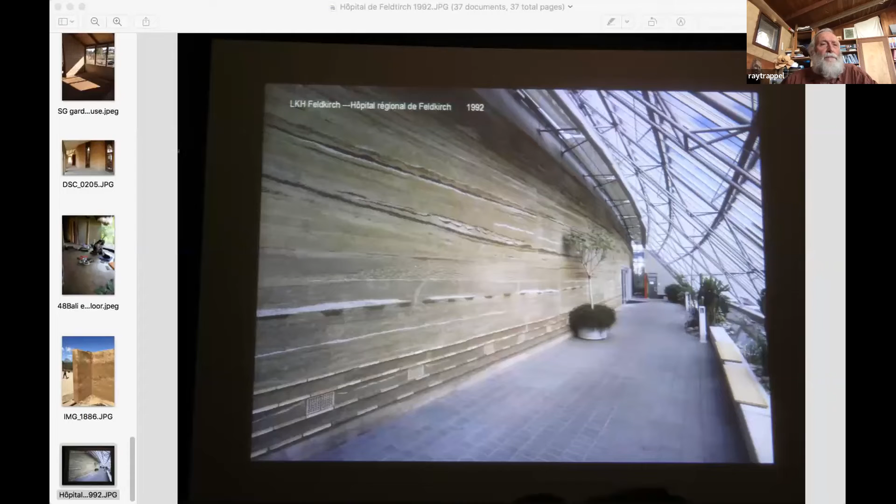No, wonderful. Stop share. Yep. Yeah, that's great.

Thanks. Yeah, they're just such beautiful buildings. The precast panels is something I hadn't heard of before, and quite interesting to see that that's somewhere that rammed earth is going as well. So yeah, it's probably one of the... Sorry. I'd just say it's one of the bigger innovations in rammed earth, and also not using cement.

We seem to have all gone that way, and we're up to 8-10% cement now. But Martin's showing you can do some very pretty buildings without cement. And again, it's just a little bit of detailing, and that's what I think the innovation is, really just understand that a little bit of detailing, have that confidence to give it a go.

Yeah. Look, we've had plenty of questions roll in. Firstly, just thank you to all three of you for your time and really amazing photos and a great overview of what's possible with different types of earth building. So there are a couple of questions that came through around a similar theme, around loving the look of these buildings and wanting to live in something like that, but how does this work in a more urban and suburban setting?

Are there good examples of earthships, mud brick and rammed earth that work on a suburban site? I think Michelle and Ness both asked this, and something I want to add to that is how much soil do you need for a typical house, and can that come from a suburban site, or does it need a bigger footprint?